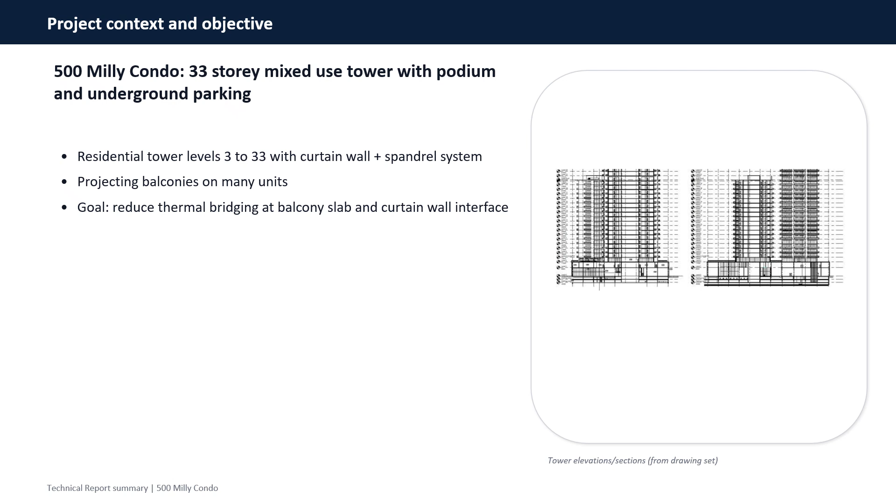This project is a high-rise mixed-use building with a podium and residential tower above, as you can see in the drawing over there. The residential envelope is mainly curtain wall with spandrel areas, and many units have balconies. Because balconies repeat floor after floor, even a small thermal bridge at one slab edge becomes a big performance penalty across the whole building. The objective is to improve the balcony slab edge detail without changing the overall architectural expression.

In the current detail, the interior slab extends through the facade line and becomes the balcony. Even though there is insulation in the spandrel cavity, the concrete is still a continuous path from warm interior to cold exterior. This is the definition of a thermal bridge, and concrete is conductive enough that this becomes significant. This also creates cold interior floor edges near balcony doors, and it increases risk of moisture problems around the slab line.

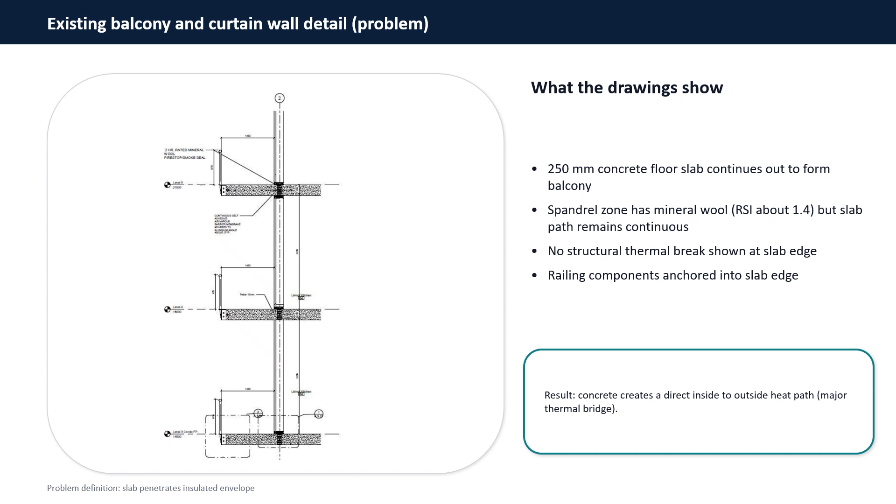All right. So here I have the image of the thermal bridging, and it shows you how heat is lost. Think of a balcony slab like a fin that pulls interior heat outward. That increases heating demand and can also affect cooling. More importantly for occupants, interior surfaces near the slab edge get colder, so comfort drops due to radiant cooling and

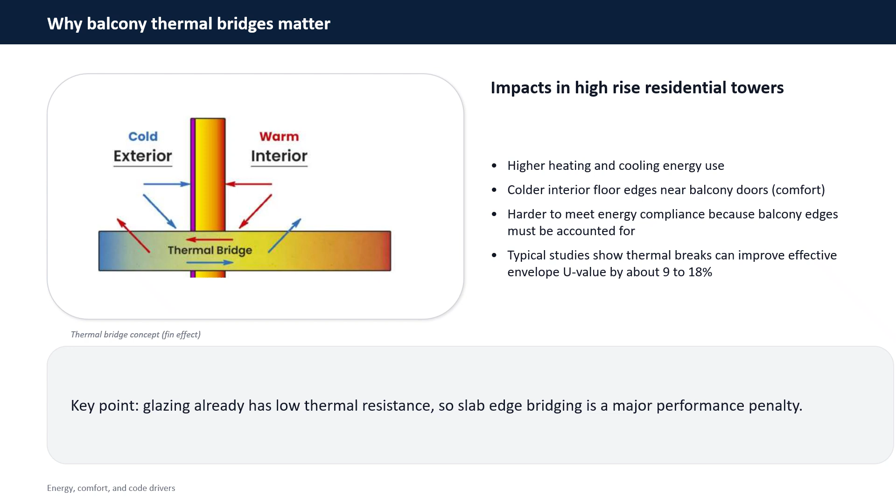draft sensitivity near doors. From a compliance standpoint, Ontario energy compliance through SB-10 and city performance targets increasingly expect thermal bridging to be accounted for, especially at repeating slab edges.

When the slab edge is cold enough, interior air moisture can condense on finishes near the floor line. That can lead to staining and long-term mold risk, especially in perimeter zones. In spandrel areas, if interior air leaks into the cavity and hits cold surfaces, you can also get hidden condensation. So the fix is not just the insulation, it is also keeping the air and vapor control layers continuous through the slab edge zone.

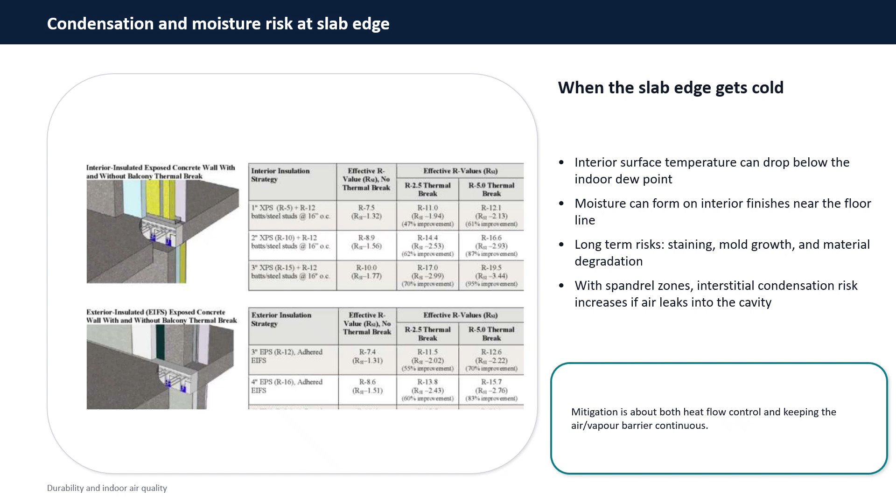Okay, let's move on to the next slide. So there are three realistic approaches. The baseline is what we have now. It is simple structurally, but performance is poor, and moisture risk is higher. Option A is best thermally. Keep the interior slab inside the envelope and support balconies separately, but that usually changes structure, detailing, and facade condition a lot.

Option B uses a proprietary structural thermal break connector at the slab edge. It preserves the cantilevered balcony appearance and is commonly used in cast-in-place concrete towers. For this project, option B, in my opinion, is the best balance of performance and feasibility. So let's move on to the recommended solution: structural thermal break plus continuous insulation.

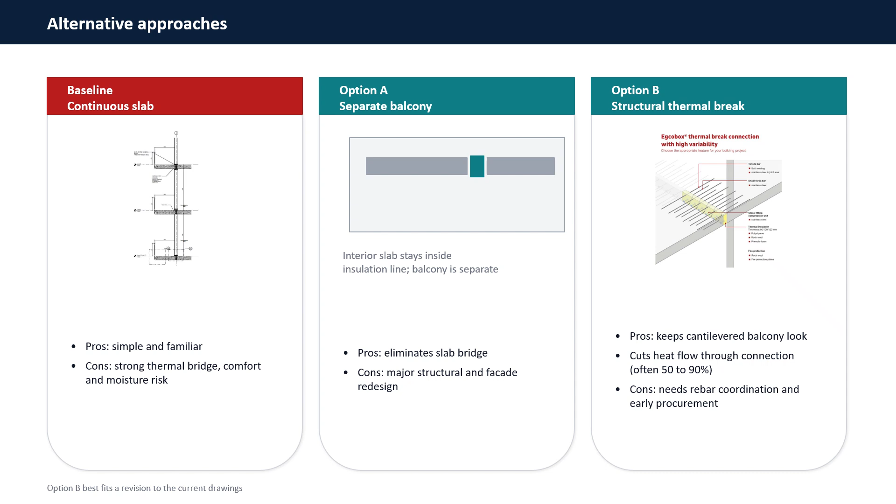The proposed detail adds the thermal break connector right at the building face, aligned with the curtain wall line. The spandrel insulation needs to be continuous and overlap the slab edge zone, so you do not leave an uninsulated band. Air and vapor barrier continuity is critical. The membrane needs to connect from the slab edge area up behind the spandrel and tie into the curtain wall air barrier approach.

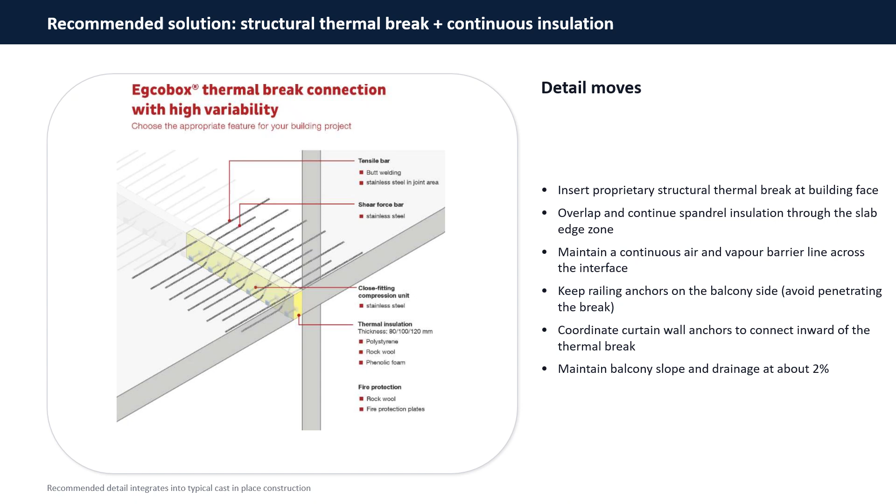Also avoid penetrating the thermal break zone with railing posts. Keep attachments on the balcony side. Finally, maintain a proper slope and drainage strategy so water does not track back towards the facade. Okay, let's move on to the next slide.

Performance is often expressed as reduced linear thermal transmittance at the balcony edge, meaning less heat loss per meter of slab edge. Published studies and product data generally show the connector can cut heat flow dramatically compared to a solid slab and can meaningfully improve the effective envelope performance in buildings with lots of balconies. In practice, this means warmer interior surfaces at the floor line, less risk of condensation, and an easier path to meeting energy targets without overcompensating elsewhere.

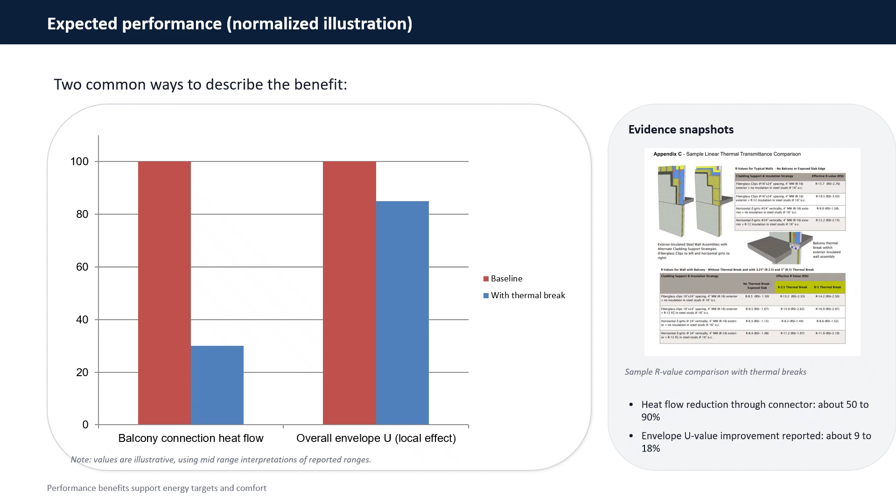In this slide, I'll talk about coordination and constructability checklists. This detail works only if coordination happens early. Structure needs to select the connector and design for bending and shear demands at each balcony. Reinforcing layout has to match the manufacturer's requirements and modules must be on site before each pour.

The curtain wall anchorage must avoid short-circuiting the thermal break. Firestopping and waterproofing details also need to be resolved, since slab edges are a key transition zone. Quality control matters, especially preventing any hardware from bypassing the break.

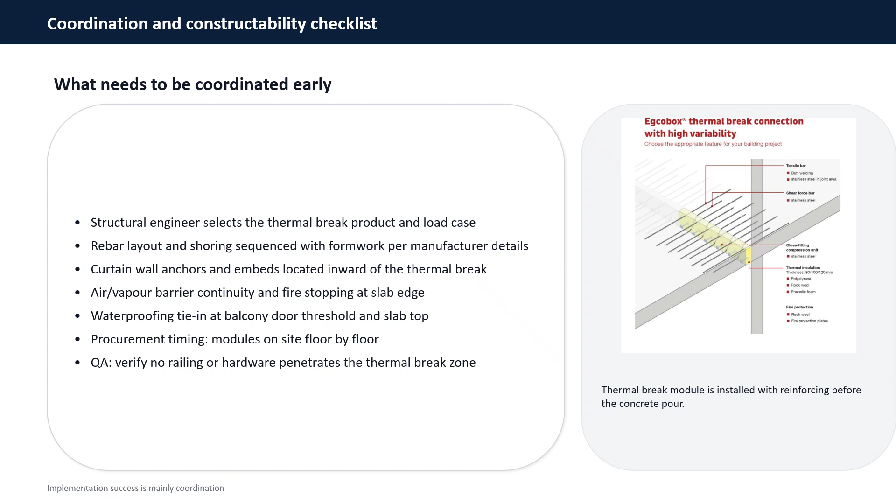I would like to conclude by saying that the current balcony slab detail creates major thermal bridging at every unit with a balcony. The recommended revision keeps the design intent but adds a structural thermal break and better continuity of insulation and control layers. This improves energy performance, occupant comfort, and durability and supports compliance expectations in Ontario.